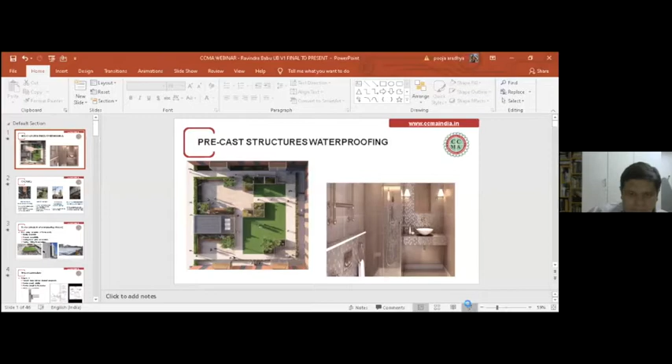As Sunny was mentioning, this is more of a sharing of experiences. Not only that, we as manufacturers need to upgrade the standards, relevant standards, and the product application levels in the industry.

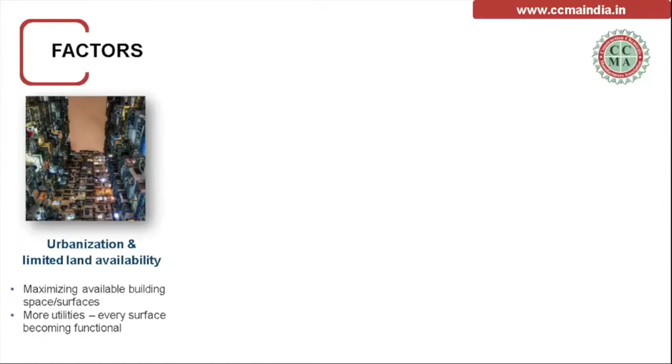Everything is, they look for dry, dwellable areas to make use of maximum space with high value. Then the climatic changes, and then a lot of topography changes.

Many times when we were discussing with consultants, they say my water table level is at so and so level, why should I go for this kind of system? And all those arguments used to be there.

But nowadays, the kind of urbanization is happening, and adjacent structures occupying the drainage areas, reclamation - all leading to many surprises when the building is actually occupied and put into use.

So the third thing is, again, the pace of construction, the type of construction, and quality of the material, which all lead to the need for waterproofing.

When we look into that, most durability failures happen due to water leakage, which corrodes the reinforcement of the structures. So when we look at this, it shows how critical and necessary waterproofing is.

In one of the forums, I read a beautiful sentence. They said, don't ask me what is the cost of waterproofing. Just ask me, if you don't do waterproofing, how much it will cost for a building.

So that's the thing - it's the most critical, but however, most of the recent times we have seen it is the most neglected baby, waterproofing, in the structural designing time, where they don't consult the specialist manufacturers to have the right specification. This leads to a lot of challenges while executing projects.

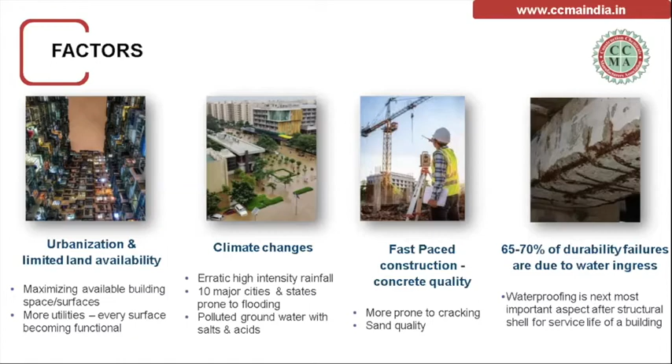So when we look into the basic principles of waterproofing, for the waterproofing to get successful in any structure, as a standalone, waterproofing can never be successful in keeping the structure dry.

The most important thing is the design of the waterproofing as a system for the specific structure, and the workmanship. Both I can say go 50-50. Whatever the best design, if there is a lack of workmanship and adaptability, then the whole thing will not be purposefully intended, whatever we have been designing.

So either waterproofing is 100% or it's a failure. There is nothing even 98-99%. So design and workmanship should go hand in hand.

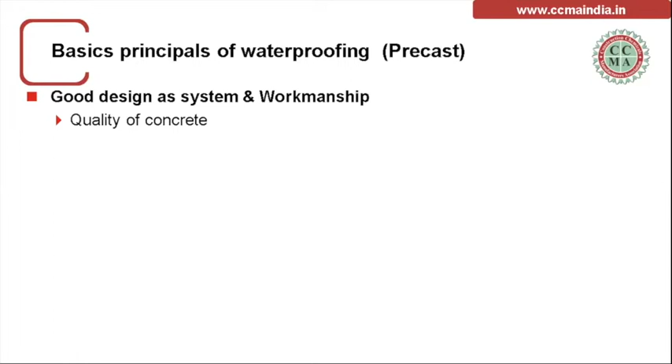Then the quality of the concrete - this is the one which, whenever we discuss with specifiers or clients, this point itself doesn't come into the discussion most of the time. So quality of the concrete is the basic which needs to have standards for the successful waterproofing system.

Then the product compatibility - it depends on the type of structure, usage, topographical areas where we are doing it, and the part of the structure. So we have to choose the right product compatibility for the waterproofing intended in the structure. Then sealing around the joints and junctions.

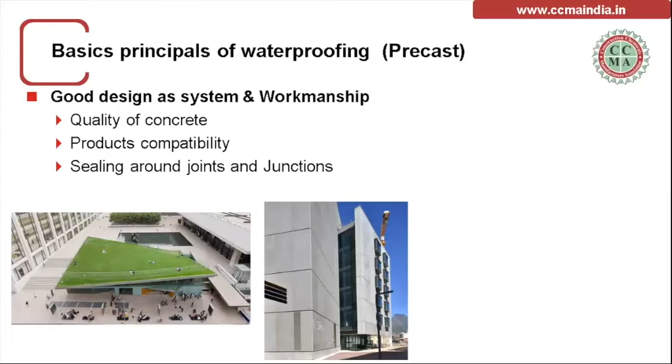This is also very critical for the successful water tightness of the building when we look into that. So we would be discussing that, and then specifically in precast also we would be touching upon filling the connections.

Just to brief you before I carry on these presentations, a lot of our members already presented on precast connections and sealing the joints in detail. However, since it is part of the waterproofing, I'd like to touch upon and add what exactly we expect the specification and standards to be.

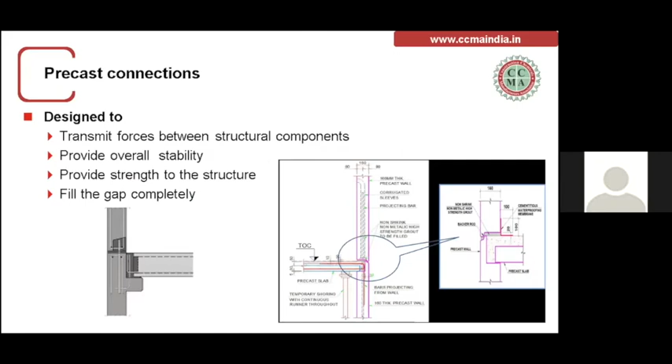So connections, we've all heard these definitions quite a number of times. It is to transmit the force between the structural components of a precast structure, giving overall stability for the purpose it has been built, and strength to the structure. Finally, the connections need to be filled completely. This is most important when we take the view of waterproofing as well, not only structural.

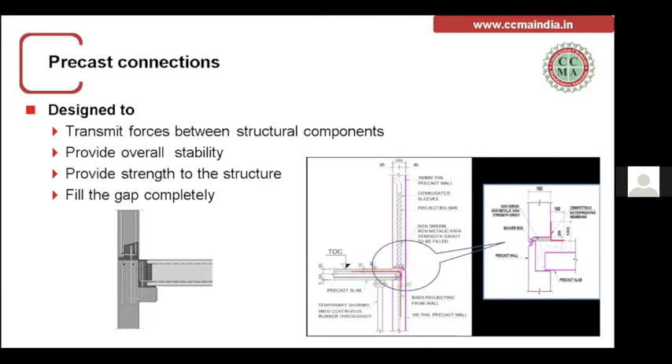So what would we use to fill, as a very basic definition known for a long time? It is to fill the gap between the connections, making it behave monolithically to transfer the loads, and to sustain the live loads and deflection it has been intended to design for. So it's a very critical material used to fill the gap.

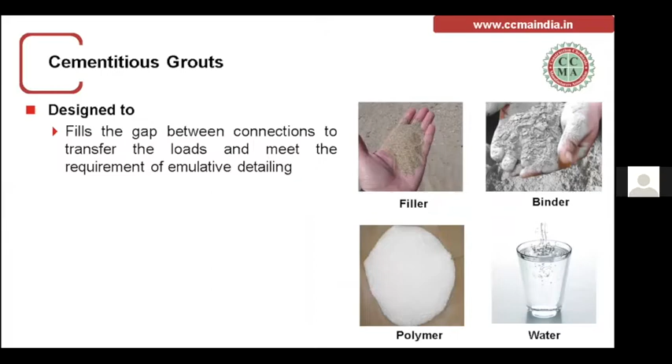Of course it is made up of fine aggregates, cement, cementitious material, polymers, and water. These are the grout ingredients, as a very basic thing.

But when we select the grout, we should have some level of performance from it. It should be able to transfer the load successfully without disintegrating, cracking, or failing under compressive loads. The next very important thing is complete filling of voids—there should not be any gap developed, nor any shrinkage because of bleeding or lack of flow when there is heavy congested reinforcement. So it should fill up completely.

Then what we design into the grout, as selected and specified by the manufacturer, is high compressive strength, with no segregation or bleeding while pouring. Then expansion compensation—it should not have either hardened shrinkage or plastic shrinkage. That is C-type grout, which is what specifiers select while picking up the performance of the grouts.

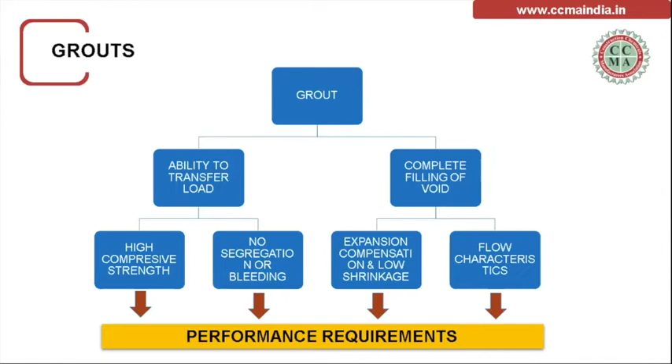And most important, apart from all these things, is flow characteristics. This plays an important role in achieving complete void filling and an effective bearing area as per design, greater than 85%. So this is the very basic structure of the grout where performance requirements for users or specifiers will look broadly to start with. This has been discussed in detail already, as I mentioned earlier.

So I will just keep my discussion specifically to a couple of properties that are very important to deliver the intended outputs of the grout. It should basically be C-type, meaning it will have dual shrinkage compensation—plastic shrinkage compensation as well as hardened shrinkage compensation. This is the one type of grout that should basically be used.

Then effective bearing area targeted should be greater than 85%, though it's always good to design for 90% during testing—but the standard says greater than 85%. Plastic and hardened shrinkage, as per ASTM C827, will be measured. The important thing here is that plastic shrinkage compensation expansion should not go beyond 1%. That's how a good grout should be designed.

Now I'll come to the most critical part, where nowadays we don't see much in the specification from specifiers other than compressive strength, flow, and 1-day, 3-day strength. I would rather give the most importance to the flowing ability and fluidity of the grout, for it to be successful in achieving its intended usage.

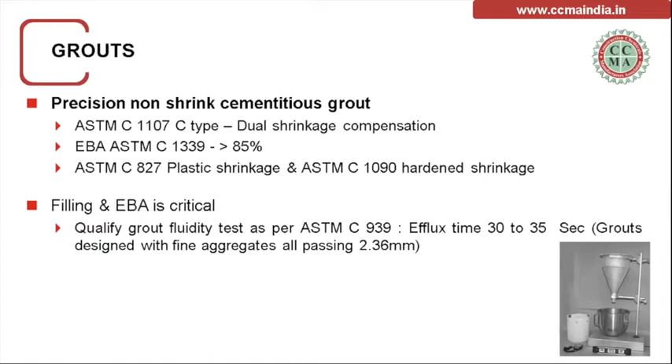So the next thing for waterproofing is the joints. These are intentional joints - either expansion, shrinkage, or isolation joints - and one unintentional type, the construction joints. These joints need to be taken care of in precast segment waterproofing. This is the most critical thing, because water tightness of the structure in precast will have many joints, so we need to design properly with the right usage of sealants.

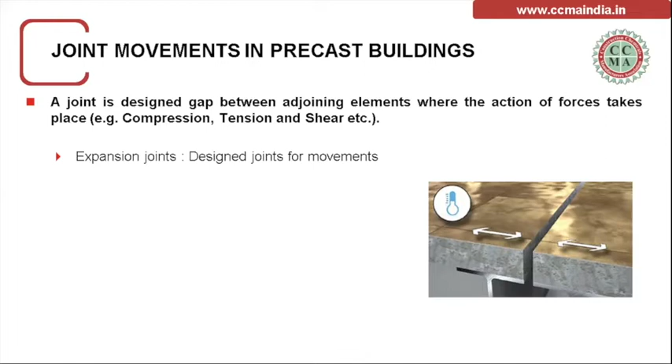Let's see briefly the outlook of this. We have expansion joints, which we all know are intended for movement of the structure due to thermal movements, which has been designed.

Then we have precast wall panel joints when we look into the building. The joint gaps and sealing may have many different methods, as per the designs. I won't get into much detail since we've already discussed joints previously. The intention here is to address what right kind of sealants we need to select so that the waterproofing will be successful in precast structures.

Today all buyers have become so educated. In the latest 2-3 bigger precast mega projects, clients started asking more and more about the joints in precast - how the builder is going to make it watertight for them, for how many years. That is the education level they have now about precast.

Another thing is non-moving joints, which will be there in the structure. All these joints need to be addressed with the right sealant. When choosing the sealant, it depends upon the anticipated movement in the joints, the temperature it's exposed to, the climatic conditions of the part of the country the structure is in, and most importantly, the expected life of the sealant. These are the major choices the consultant considers while designing.

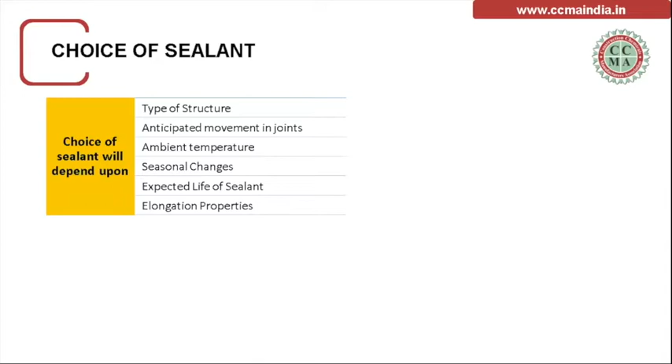And the features - the main thing is there should not be any bubble formation due to isocyanates in the presence of moisture. The formulation should not lead to any bubble formation. It should have good adhesion, and it should never sag. These are all very basic requirements which the consultant demands, along with movement accommodation factor as per the designs.

Most important, apart from all these things, is excellent weather durability, which affects the life of the sealant, then UV resistance.

But one single most important thing - in regions like Mumbai or Mangalore where there's heavy rainfall, most of the time we don't include the specification of hydrolysis test. So when we go for such critical precast structures, we should insist on hydrolysis test for sealants that are continuously exposed to heavy rainfall, either on roofs or facades which will be exposed to water.

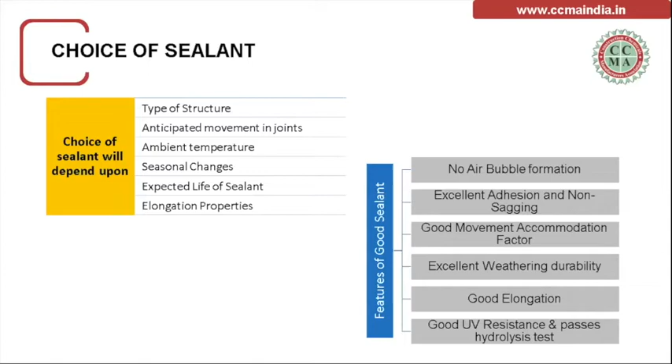So they specify this with standards which qualify ASTM C920, as we're all aware. It's a single component or multiple component. And whether they're using facade staining or non-staining grade, all those things will be chosen exactly as per ASTM C920.

And then mainly they qualify ASTM C1246 for durability, heat aging, weight loss or chalking when exposed to UV. This is what they qualify. Rest is very standard - they check hardness, movement accommodation factor (MAF), and tack-free time.

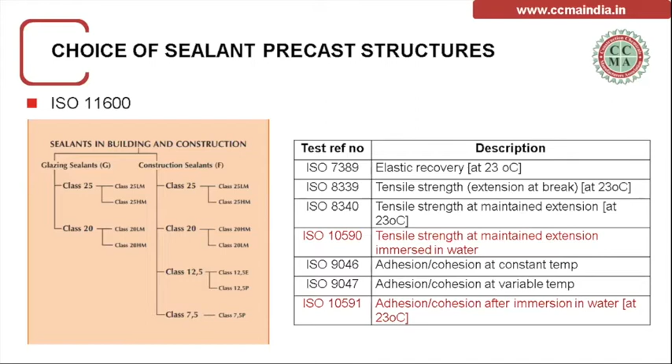But a similar standard is ISO 11600, according to all 13 classifications. The most important and critical thing ISO classification clearly states is the tensile strength must be maintained when exposed to water - whether continuous rain for 3 months, 2 months, or immersed under water, the sealant tensile strength should be maintained. At the same time, the adhesion should never get affected by exposure to this water. So these two should always get qualified, specifically when we go for joint treatment in precast structures.

So what kind of sealant is generally chosen is either single part polyurethane or silyl-terminated polyether - MS sealants. Both are good enough to get into the specification of precast buildings.

So in a nutshell, bullet points - they look for service life minimum of 10 years, anything greater than that if high-end sealants are accepted, up to 20 years is good, and that needs to be substantiated with standards for the life of the sealant. Then high UV resistance, and as I mentioned, exposure to continuous water because of rain or the roof - whatever sealant we put, if it's exposed to water, it's always safer in precast segment buildings to get the qualification of hydrolysis test. This is the one point specifically we all need to upgrade in our specification when we go for precast structure sealant specifications.

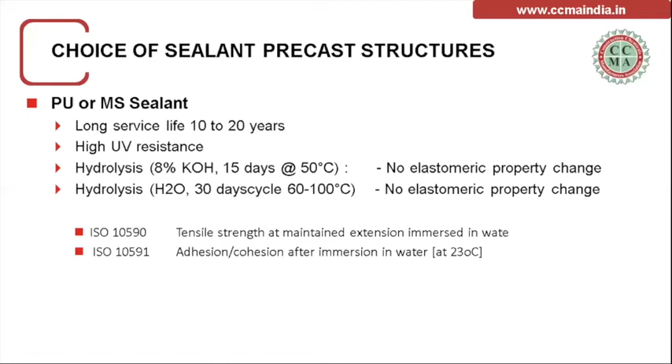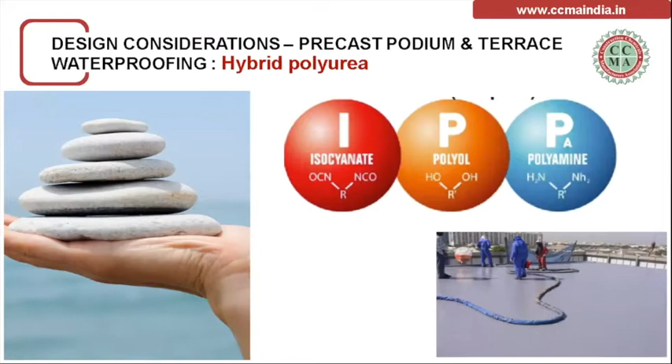So with this very in brief, after treating the proper joints and filling up the connections, our waterproofing will be on the system, what we are going to specify and how good that is the system. So for all precast podium structures or the roof slab, whatever is there, the hybrid polyurea is the one technology, the latest technology, which is very interesting.

And to start with, why hybrid? What is pure polyurea? We'll be seeing in the subsequent slides. But to start with, this is the combination of isocyanates and then a mixture of polyol and amines. That is what makes the hybrid polyurea. And we would be discussing this particular technology's suitability for precast structures waterproofing.

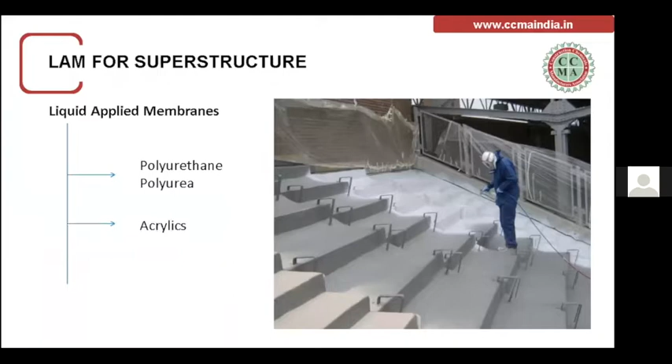So the most popular for above ground level for the precast as well as cast-in-situ is the liquid applied membranes, with various technologies available. Polyurethane, polyureas are available. Acrylic technology is available. Bituminous based products are also available.

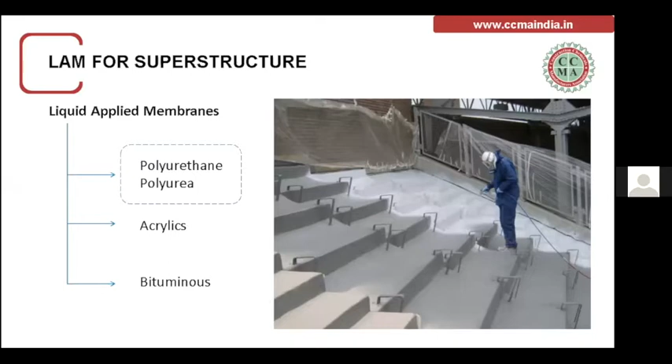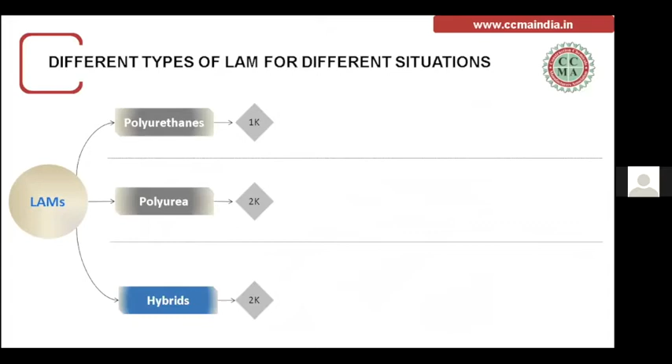When we look specifically into polyurethane, polyurea, we have 1K polyurethane systems, then 2K pure polyurea, and then the hybrid polyurethanes polyurea is available. When we just look into that while picking up the products, we looked at 1K PU.

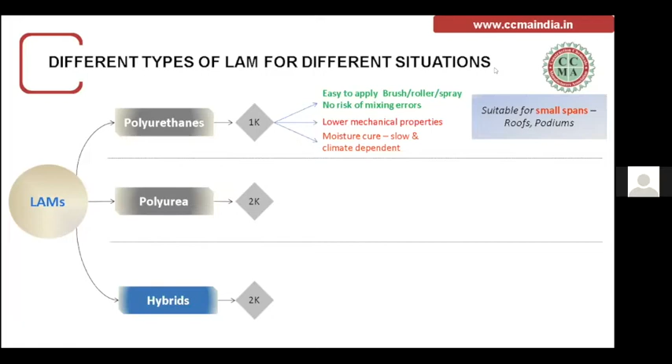It's very easy to apply, either we can spray with airless spray, or otherwise we can use roller applications. Then it will have limited mechanical properties, and the 1K product is basically known as moisture cure. It depends on various aspects of curing, rate of curing as well as efficiency of curing, depending upon the environmental conditions. So this is generally good for small span, suitable for roof and podium, where no heavy equipments or reactors are required.

So the next option is the polyurea, which in India, since 2003, they have started specifying and looking at the suitability in civil engineering constructions. So pure polyurea mechanical properties are fantastic. They have got very high tensile strength and limited elongation. But when we see the waterproofing requirement for the civil engineering aspect, it is less flexible. So that makes it a little bit rigid, but it can be used for any size of the structure. It has got very high performance, but it was always a factor of concern regarding flexibility for the waterproofing which the civil engineering industry requires.

So there comes the hybrid technology, which again uses a reactor, fast cure, and has equally good mechanical properties, but it has been designed for more flexibility, high flexibility. The major difference between pure polyurea and hybrid is, in pure polyurea, it's only amines and then the iso will be there. Whereas in hybrids, it is a mixture of polyols and amines, which has altered the mechanical properties needed to achieve waterproofing that is more flexible. So this is the one product which is widely accepted and proved in the industry today in terms of durability and suitability.

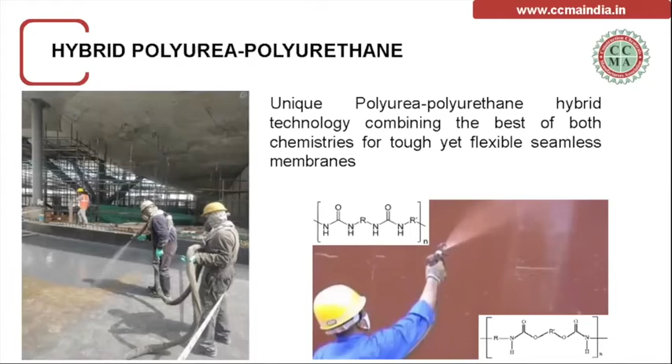So this is again, as I said, polyurea, polyurethane, but generally it has been termed as hybrid polyurea. So let's see the uniqueness of this product.

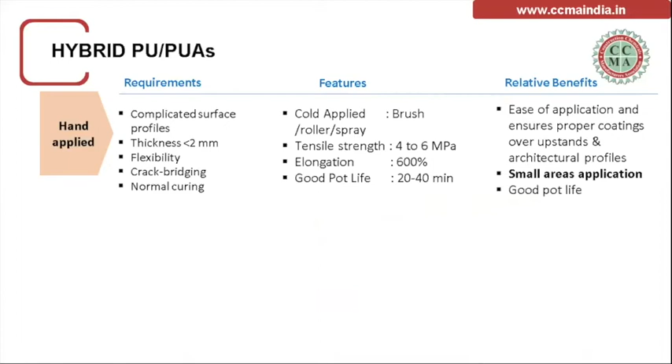So again, when we get into this hybrid polyurea polyurethane, two grades are available. One is regular hand applied, next one is the reactor spray applied. If you see the difference and positioning of the product, this hand applied will mostly be used for small areas where using reactors is not feasible. That is number one. When the area of application is considerably small, this is the most suitable product, with a tensile strength of 4 to 6 MPa with elongation of 600%. This is the hand applied cold spray material that will be used.

When compared to that, the spray applied, which is plural spray, as I mentioned, a reactor will be used. We have to observe the mechanical properties in this. It has got brilliant mechanical properties. Why is it so unique? It has got very high tensile strength, like 15 MPa, anywhere between 11 to 15 can be designed. Elongation anywhere between 300 to 500% can be designed. And the most interesting thing is the puncture resistance. Being flexible, having brilliant tensile strength designed according to the needs, it is still a versatile material that has such high puncture resistance. This has made it unique, where no other waterproofing material technology can deliver both flexibility and high tensile strength, as well as resistance to mechanical abuses on the membrane, like puncture resistance and abrasion resistance.

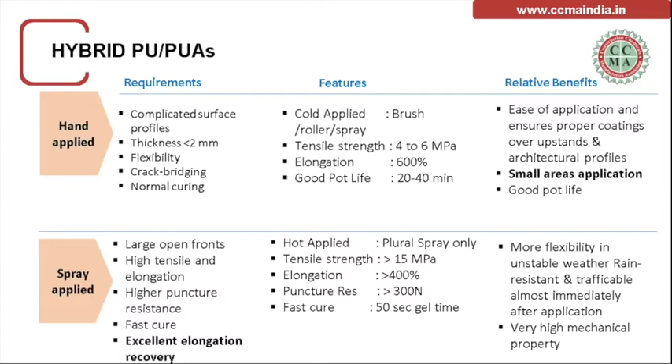This has made much more fit into the groove for suitable specification of waterproofing of podium and precast roof and other areas. So what we actually need to focus on is choosing the membrane properties of polyurea.

A lot of times it has got no meaning. We have been observing this in the industry. We talk only about the high tensile strength, or many times the high elongation, 600, 800%. So when we see either tensile strength or elongation as a standalone property, it will make no value addition to the waterproofing membrane.

What we need to see is, we should always focus on crack bridging ability, as per EN 1062, both dynamic and static. So all these mechanical properties of elongation, tensile and tear strength put together should deliver our crack bridging ability in dynamic conditions. That is the actual output we need to see from all the combination of these properties.

Tear strength, why it is so important, not only because of the constructional practices of users. When there is a shear force that acts in the precast slab or even in the podium slab, when the joints are there, it should be able to sustain. So all these properties we will be seeing with the small clippings in the subsequent slides, which make it more convincing.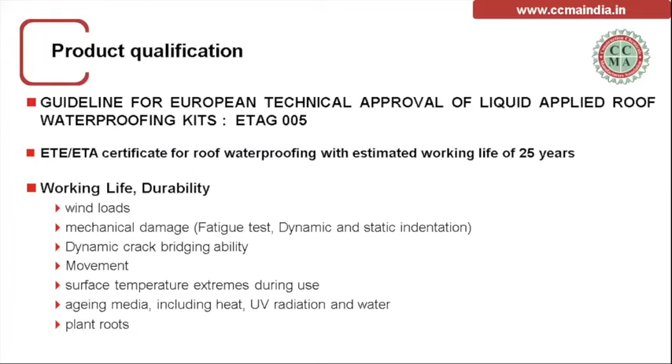When we talk about life, there will be many manufacturers, many specifications we say. Some people sometimes say 10 years, sometimes life - I'm talking about the life, not the warranty. So they talk about 10, 15, 25 years. How to arrive at that should be supported with the right certification of the product, which makes sure to keep all quality products on the same platform for the consultant to choose. This should be reflecting in our specifications as well as technical data sheets.

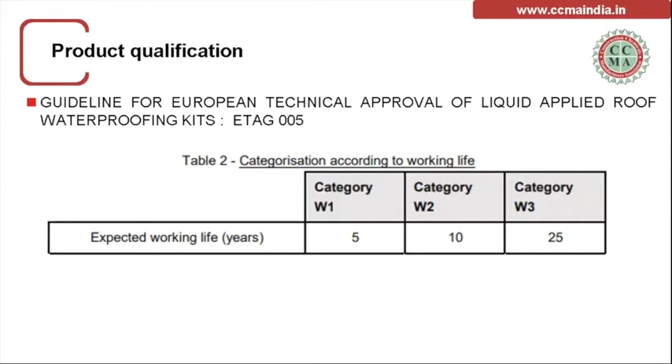In continuation, this is how they categorized based on the test: W1, W2 and W3 categories, which fall under expected working life. Based on that, they would be estimating it at 5, 10, and 25 years. So this is how we should make sure the specification is drawn with our products and standard certifications.

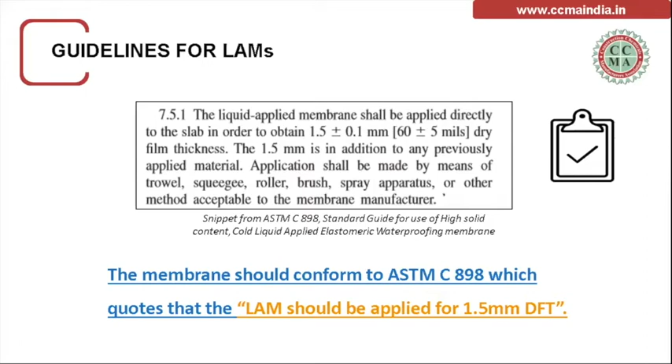Then again, one more challenge will be there for us. Many times we have seen different thicknesses proposed to consultants. There is a clear specification which is based on the concrete profile, based on the shear stress it develops in the movements, and based on the temperatures it goes through. Any general liquid applied membrane, to deliver, should be a minimum of 1.5 mm. This is what ASTM C898 says. So accordingly, most products will be designed.

When we talk about fast cure products, there is always a risk of pinholing. This may happen for various reasons. One is the outgassing of air or moisture in the pores of the concrete if it is not completely filled up by the primer. That is number one. Number two, the concrete itself—there may be a lot of undulations and damages in the concrete. When the fast cure hits the surface, there are chances of creating pinholes because the wetting time of the product will be very, very low.

This is the most critical issue, as per me. In the specification, we should add that holiday testing of the membrane after application is a must, to make sure that when we apply 35-40,000 square meters area, we would not be able to certify it as a pinhole free area unless we do this because of the fast cure. It should become mandatory for us when we specify fast cure polyurea to do holiday testing. It's a small clipping, around less than a minute. I would like to play it for you.

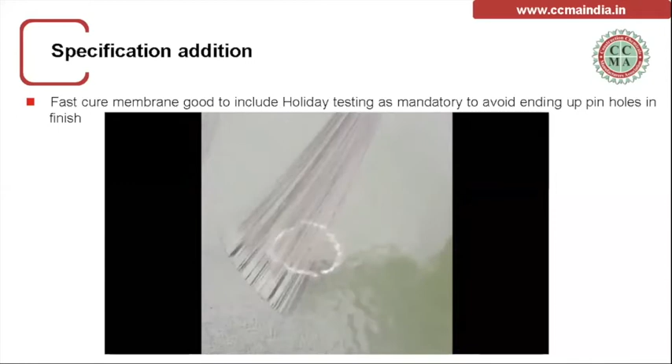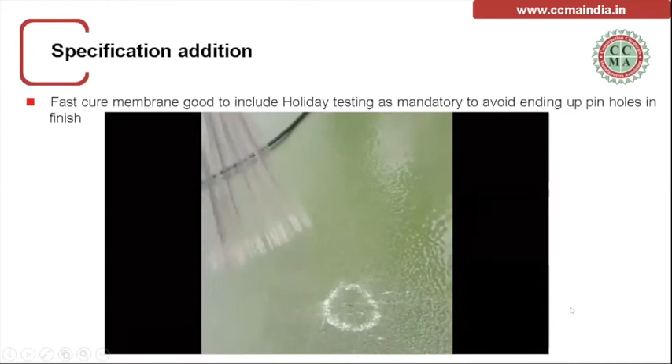So this is a small demo. We will have a couple of kinds of holiday testing equipment. Another one is with a long roller kind of a thing, which I will show in subsequent photographs when we do it for larger areas.

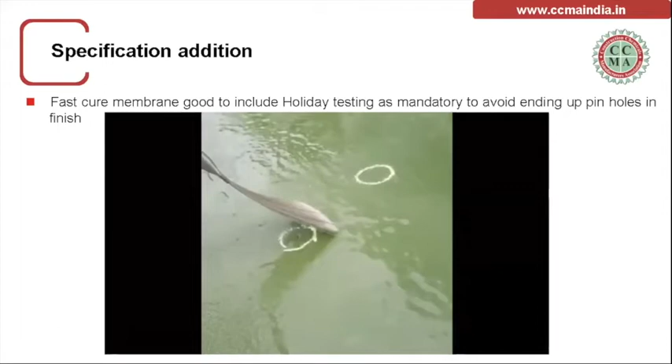As the technology goes higher and up, achieving the complications will be there unless it is all handled properly. So out of that, a few common, very critical points I would like to highlight in this discussion. One is achieving the mechanical properties. We say it's fantastic, high mechanical properties achievable, more flexible, high tensile, including good abrasion resistance and all. So how do we achieve this?

When we see the spray equipment of fast cure polyurea, it's a reactor which will be spraying the material at 75 to 80 degree temperature. Not only in the machine, before spraying, the entire hose length, which is heat insulated, the material travels through the hose at 75 to 80 degree temperature. And when it comes out of the gun...

Otherwise, the most easy and popular method used is grit blasting, captive shot blasting, to achieve this surface profile, which is most important for the success of waterproofing membrane adhesion to the concrete surface. Apart from that, higher the technology, higher the care should be to get the fantastic results we claim.

The most important thing we need to see is the dew point. It plays a very important role. As we know, when substrate temperature is less than the dew point temperature, condensation will happen on the primed surface. Because of that, whatever waterproofing system we apply in that situation, there will be adhesion failure, or there could be very less adhesion.

So how to control this? First and foremost, if the atmosphere relative humidity is high when spraying waterproofing membranes, it leads to adhesion issues, so this needs to be monitored and controlled.

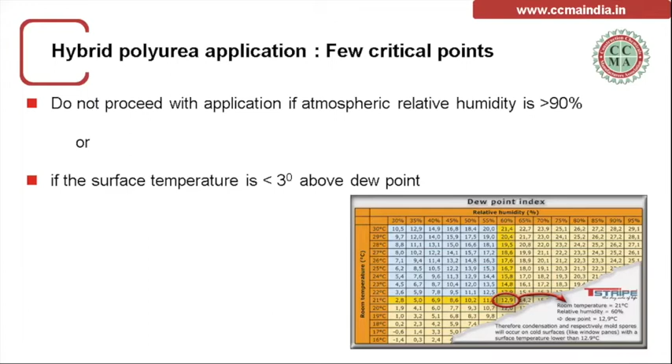Am I audible, Sunny? Hello, it's Sunny, breaking up, am I a little audible? Yeah, it was breaking up a little bit, but now it seems clear. I think it's just jumping a little bit in between, whenever there's some network variation. You can continue, sir, that's the reason. Sorry.

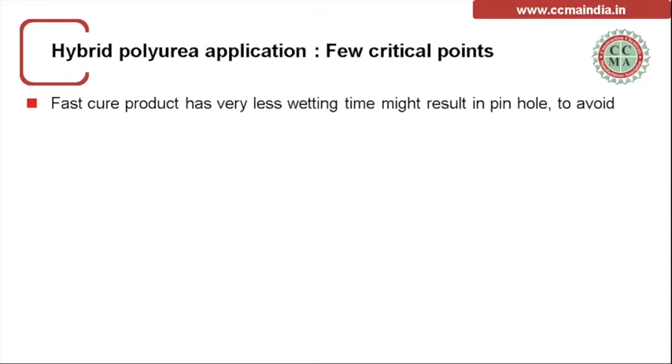Then a few more critical points. The fast cure product has very less wetting time. This might result in pinholes. So to avoid this, knowing this, what we will do is first and foremost, use as a first coat a highly penetrative, low viscous primer. This is the first thing we need to do.

After doing this, the same primer should be used as a scratch coat with dry quartz powder. It will suffice with this process of primer so that it gets filled up good enough to avoid the pinholes. This is one of the basic things we need to do in polyurea application.

Then we would go ahead with the spray of polyurea on the primed surface. And for huge areas, we have to do holiday checking, which would be part and parcel of our specification. There is design-specific equipment, whether on precast slab, podium slab, or bridge deck. We check for this before going for any subsequent treatment of polyurea.

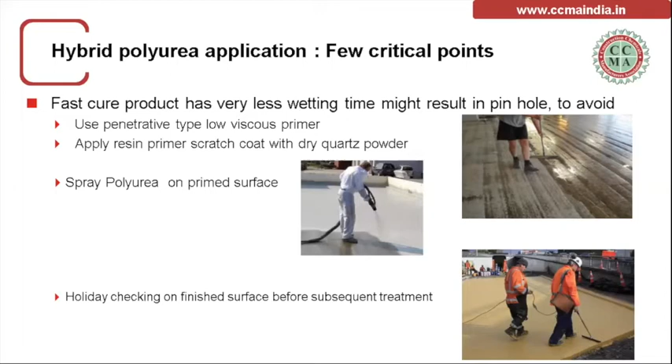The next thing is we have to see the cracks, whether less than 2 mm or greater. What happens is when these shrinkage cracks develop through and through, due to thermal stresses from flexural strength or shear stress of the concrete, then crack widening and movement will happen.

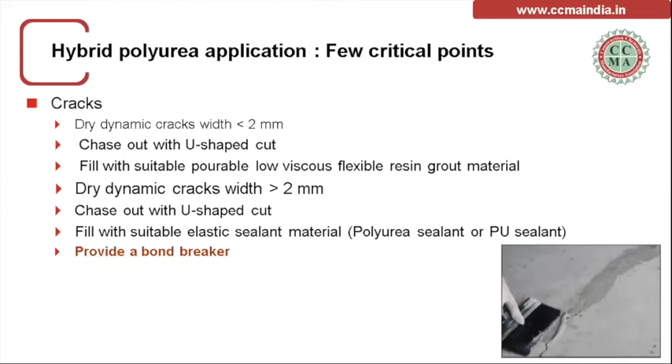So keeping in mind the differential temperatures and the kind of movement expected in the crack, as a first line of defense, we will always treat it accordingly. We will put a bond breaker before spraying the polyurea. Similarly, when there are cracks less than 2 mm, we use flexible resin grout, which can penetrate into the gaps and fill by itself. This is a very important process to keep in mind while treating cracks before going ahead with the spray of polyurea systems.

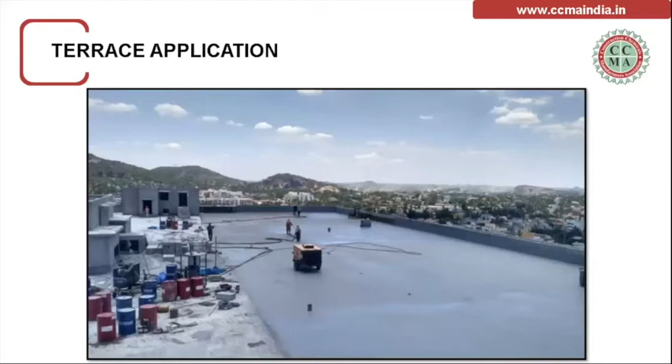This is one of the site pictures we have shown. Now I would just play some 2 to 3 minutes of video. A few of our audience members might have seen this, some might not have. We specifically show this to demonstrate elongation recovery, tensile strength, all those things, and how fast curing is achieved. This is the demo, which we also do in webinars. It's an interesting video, I'll just play a couple of minutes.

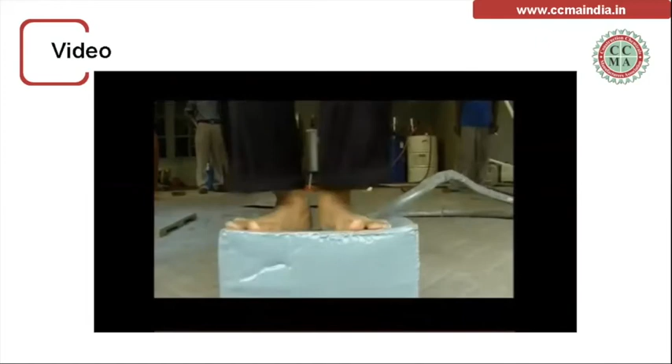You could see this is a carton box which we are spraying polyurea straight away on. You could see the sturdiness, elongation, and recovery with flexibility. This demonstration shows the tensile strength as well as fast cure. We have been spraying polyurea on the surface of water as well. Just you could see here, before it sets, within 3 to 6 seconds, it doesn't even flow more than an inch.

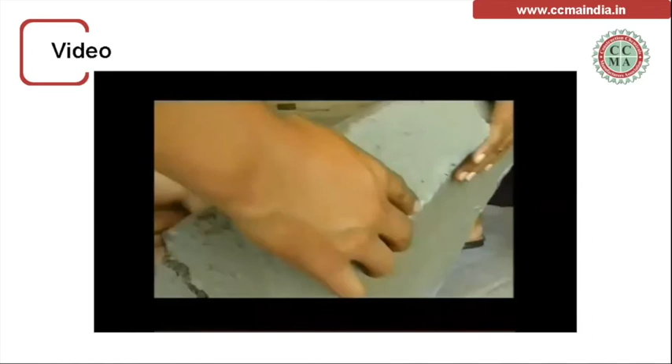And this shows the tear strength of the product, as I was mentioning. Even when the concrete slab is broken, the membrane doesn't tear off or come out.

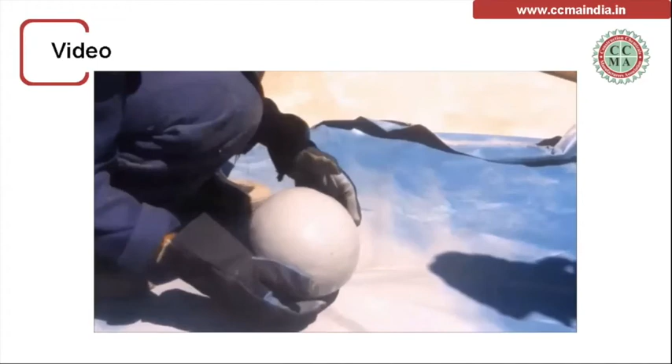The same watermelon has been coated with polyurea.

So that's a brief about polyurea and a demonstration to show the properties that can be achieved.

So I will now move on to wet area waterproofing. This is the most critical day-to-day area for living comfort, both for the builders as well as for the dwelling purpose of the residents. This is one area which needs to be taken care of very well, whether it's a precast segment or cast-in-situ or whatever it is.

So briefly about wet area waterproofing - there may be a lot of leakages that we have seen if it has not been done properly, from the corners of the slab, from the top floor, pipe penetrations, and door sills. These are all vulnerable areas, the wet areas where the most critical waterproofing failures happen in a building.

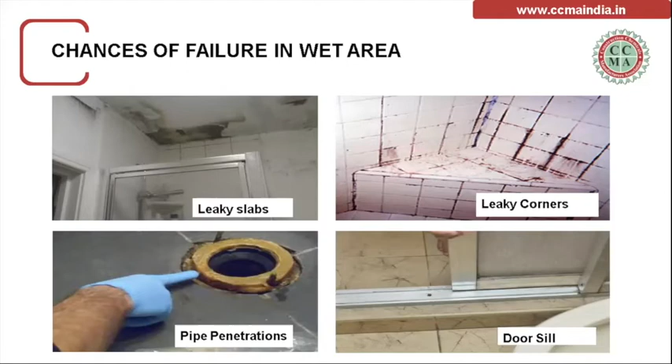So the presence of moisture will always be there, as the wet areas by name itself. Then the walls where showers will be there, continuous splash of water will be there. Also, a lot of congested areas by design for completing the waterproofing itself - the kind of system creates a lot of constraints which will be challenging.

Then there could be some - just a second, the internet is wobbling again. One second. Yeah, I hope now it is okay.

Okay, then the adhesion - whatever systems we are choosing should have better adhesion to the substrate, which should not have any limitations.

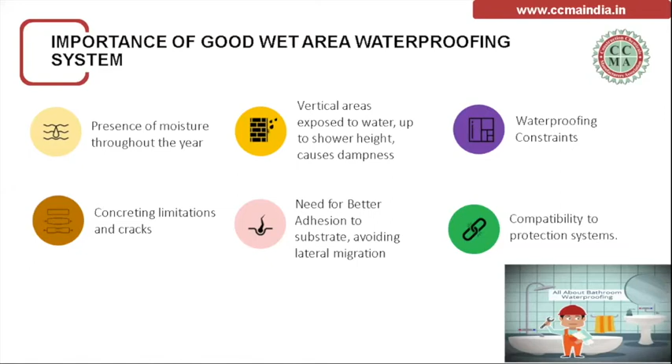Then the compatibility to the protection systems what we do - so generally these are all the points we keep in mind. We will see better bonding, whether there is some moisture or residual moisture, whatever the reason, better bonding should be there in what we choose.

Then it should not be too thin coatings - it should be a minimum thickness of the coating, anywhere between 1 to 2 mm, not less than that. And then for bore packing, we have to use the right material and right specification, which is the key for the success of wet area waterproofing.

Then special care at the joints - whatever joints, we have to use the right jointing tapes so that there won't be any slight abrupt cut edge for the waterproofing membranes, which in the long run might pose a risk for our system.

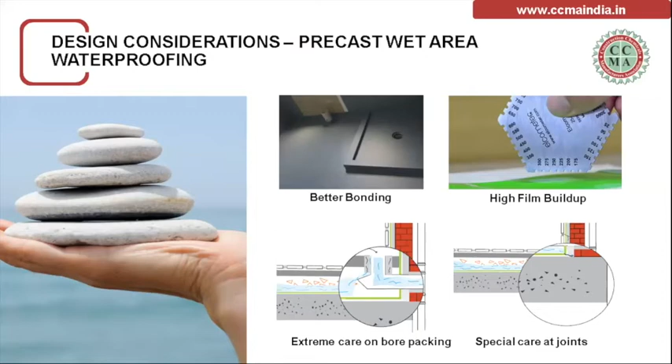So when we see, there is a Singapore Code of Practice which has very well defined the kind of system for wet areas, and they are encouraging it, which has got long job references of successful jobs for many years.

So as per the specification, the most efficient is they treat it as a cementitious system, that is acrylic cementitious system. Apart from that, polyurethanes are there. Then acrylic, which is styrene butadiene or pure acrylic, which will be mixed.

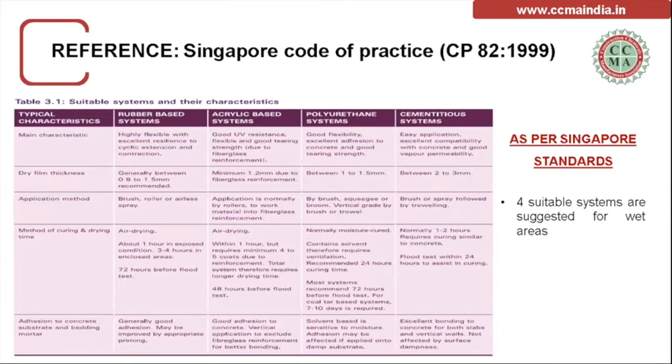Systems are available in the code of practice for wet areas, but the most popular is the cementitious system as of now, because of various properties - its adhesion even on moisture surfaces, the compatibility, performance of the product with no much cracks. It should have static crack accommodation, which the cementitious system can very well deliver. So generally the cementitious system is very popular for wet area specification.

We see that generally our industries and manufacturers are offering polymer modified waterproof coating. As I mentioned, it is either SBR based or acrylic based, which will be mixed with cement and applied using a brush. Then acrylic cementitious coating, which is very popular in India now, which is a pre-mixed material of cementitious with polymer mixed powder.

And the SBR liquid or acrylic liquid will be there - this is higher performance. Mr. Ravindra, your voice is stuttering a bit again. Can you just say that again? One second, I will try to switch the internet. Is it okay now? Yeah, now it's better.

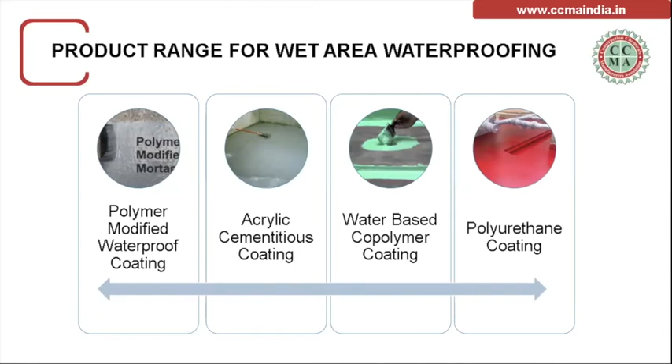Then the new technology that has come today to overcome the shortcomings of acrylic cementitious is the water-based copolymer coating, for high-end structures as they see. Then the polyurethane coatings, available for a long time, very popular product, single part or two part polyurethanes. Mostly they use 1K polyurethane.

When we look into that, what product to choose, and how it goes better. Polymer cement coating, as I mentioned, is SBR or latex mixed. So quality control at site is a challenge. Thickness cannot be maintained, and the quality will be left to the person applying it on site. These are all the shortcomings when we get polymer cementitious coating done for projects.

Then the next one, the most popular specification, well proven, is acrylic cementitious coating. This is pre-packed, good quality control, right thicknesses can be maintained so that performance will be determined, and it can go even on moist concrete, that is residual moisture, even if it is slightly higher, doesn't matter. It can have proper bonding and perform.

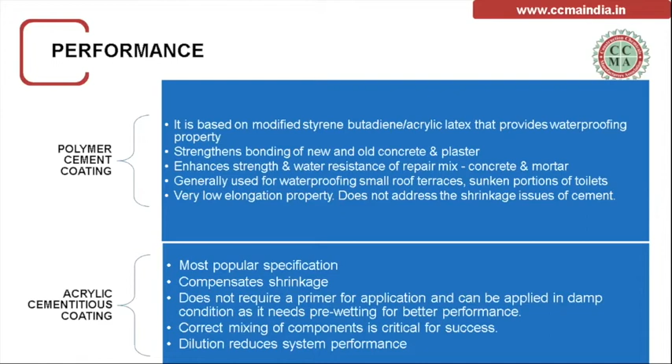So the next one we have been using for high-end structures all these days is polyurethane coating. As we know, 1K PU has got very good tensile and elongation, crack bridging, even though there won't be much thermal variation cracks, it will never develop or move. Only static cracks will be there in the sunken slab while treating. Still, PU gives an added advantage if there are any slight movements in the cracks, so it gives better life.

But the biggest challenge when we do waterproofing of sunken slab is polyurethane coating should have a dry surface. That means residual moisture should be less than 5% in the concrete. That is the one challenge we always have. If by any chance it doesn't follow, there will always be an issue of adhesion failures in the polyurethane.

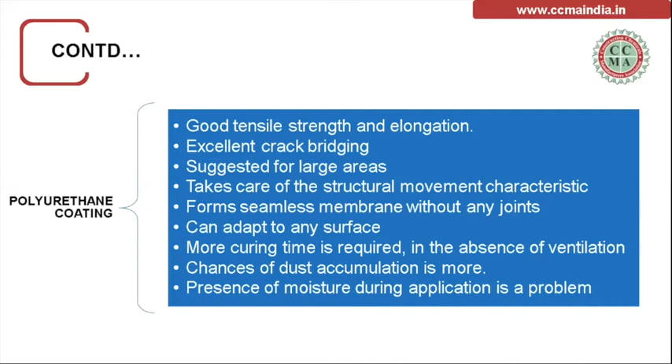So now the latest technology, which has become more popular to overcome the shortcomings even in this system, is water-based copolymer coating. This is highly flexible and elastic, and can go even on wet surfaces. It's a water-based formulation, absolutely no problem. This product has been certified under green label, so when we go for LEED points and all, this helps a lot to use an environmentally friendly product. It doesn't require any protection screed when we go for a flat slab kind of sunken slab, where tiles can go directly above this.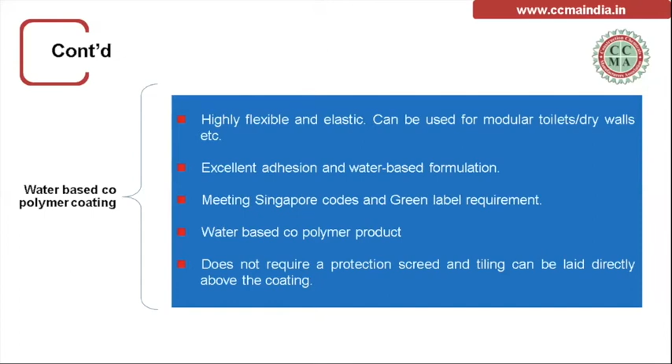So these are a few advantages contributing towards wet area waterproofing with water-based copolymer coatings. When we see acrylic cementitious coating, which is very popular and has got elongation from different formulations from different manufacturers, ranging from 50 to 120, it can be done. And crack bridging, when we talk static crack bridging, is up to 2mm it can take. But the only thing is, as we know, it doesn't contribute in terms of tensile strength, that's why we only say use it for wet areas where there is a static crack.

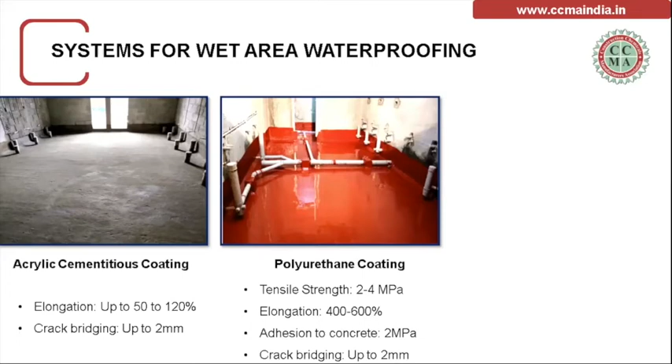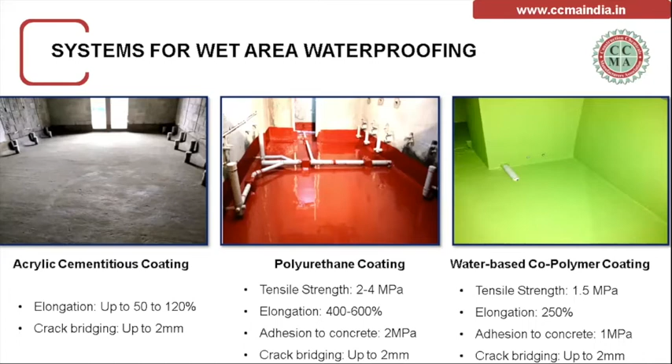Polyurethane has good tensile elongation and good adhesion, provided the surface is conducive for application of PU in terms of moisture. Then water-based copolymer coating has very good elongation, which is 250% for sunken slab. The tensile strength is 1.5 MPa, brilliant, and the crack bridging ability is good. So it overcomes the shortcoming of PU for the substrate requirement, and it's a better specification than acrylic cementitious. That's how the specification is getting upgraded in wet areas with water-based copolymer coatings nowadays.

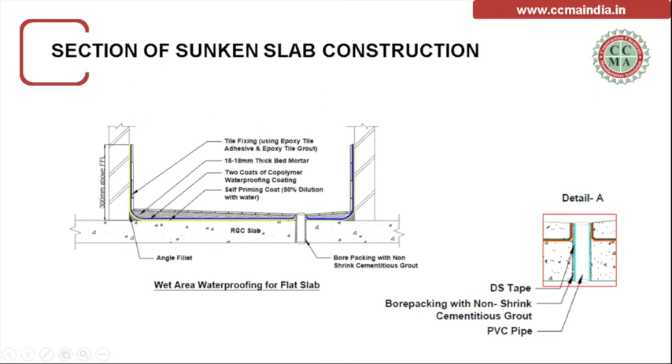And detailing, yes, the devil is in the detail for the sunken slab. We have to make sure that we use bore packing with non-shrink free flow material. Then we have to use gap seal tapes on the pipe so that different kinds of material do not give away at the sleeve gaps, which may be the source of leakage. So this is the detailing we have to take care of specifically when we do wet areas waterproofing.